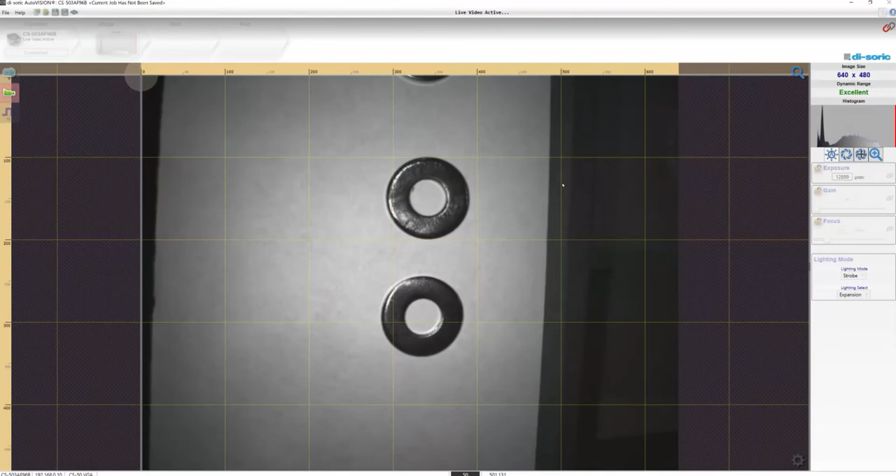But for alignment here, I'm going to turn the trigger off and I'm just going to put the camera into free run mode. I'm just going to center the objects in the middle of the field of view. Turn that off. Over here on this side, I have my auto calibration or my calibration features. The calibration or auto calibration is the one that I typically use most of the time. Again, this is an autofocus camera. So there we go. We don't have any strange glare. I'd say that image quality is pretty good.

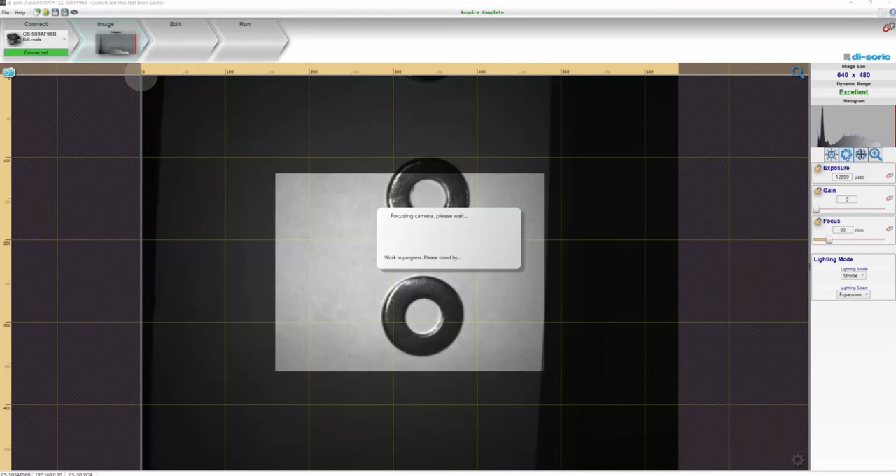You can actually also do a quick focus if you like, although I don't know why you would do that. The autofocus works very, very well. I can focus in on a specific area or detail if I like. And I can also here, with this enable zoom mode, I'm switching between the 2 focal lengths in the camera. I'm just going to do an auto calibrate. I want to take a look at both of these washers, and that's fine. So we're going to go from here.

If you want, you can play around with your exposure, your gain, and your focus. You can also change the lighting effect. So you can either turn the light on, off, you can strobe, do a power strobe, and you can use an external strobe from a flash controller.

Now the lighting select here, so you do have internal LED, those are the integrated lights, the white and red, and your expansion module. So that's the light that you order the camera with, whether it be high intensity white, high intensity red, or high intensity ultraviolet. You can also choose to buy an expansion module and even put blue in there if you like.

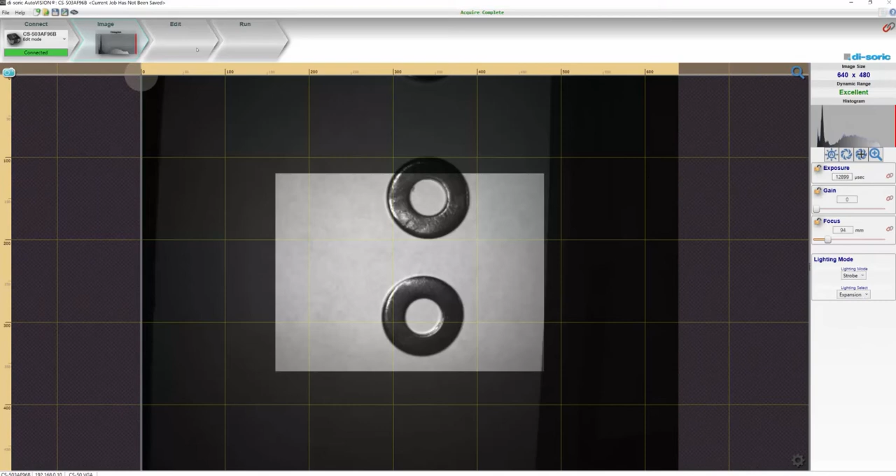Okay, so we've acquired our image. I'm going to move over to the next tab here, which is the edit section. So this is where I'm actually going to load the tools that I need to be able to do the job that I need to do. On the left-hand side here, you can see this is my tool tray, and these are my tools. So I can either drag and drop the tools in there or just simply click on them to put them in the tool tray. They will be listed in order of operation.

So on this side here, I can see my exposure and gain and focus. I'm using a sensor to trigger, so I'm going to set my trigger to sensor. It is sensor 1. The particular sensor that I am using is going to trigger on a high to low transition. I don't need to use a trigger delay, so we're good here. Okay, the first tool that I want to put in place is I want to locate the object that I'm interested in inspecting.

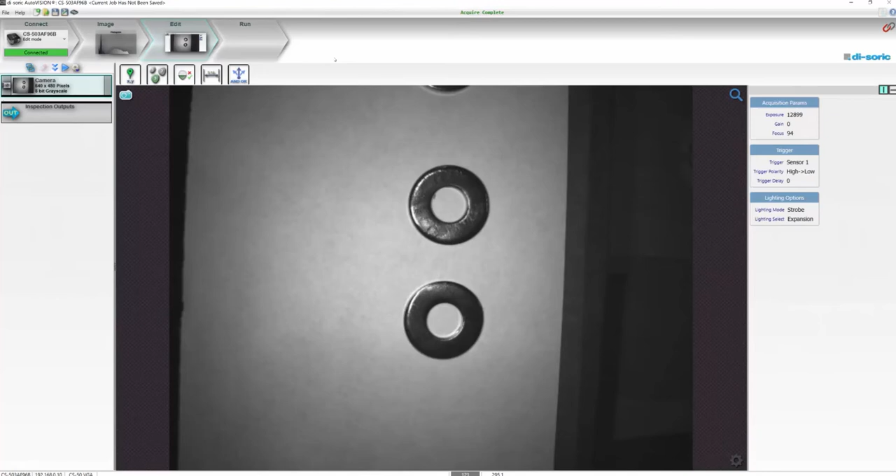Okay, so here I have my location tool. What I'm going to do is I'm going to set my region of interest. That will be the outer box here. I'm going to set it somewhat like this. So basically, anytime this object comes within this outer rectangle, it should put the tool in a positive state.

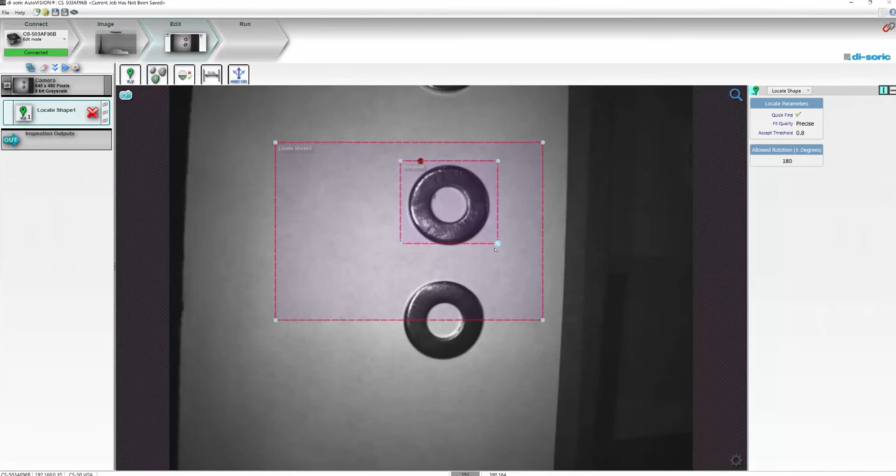Just click this little button here to train the tool. Now it's going to be looking for this object anywhere within this region of interest. I'm going to change the fit quality on this to just normal. I don't need it to be precise. All the washers are pretty much the same size, as you'll see. Okay, so I'm going to rename this. I'm going to call it locate washer 1.

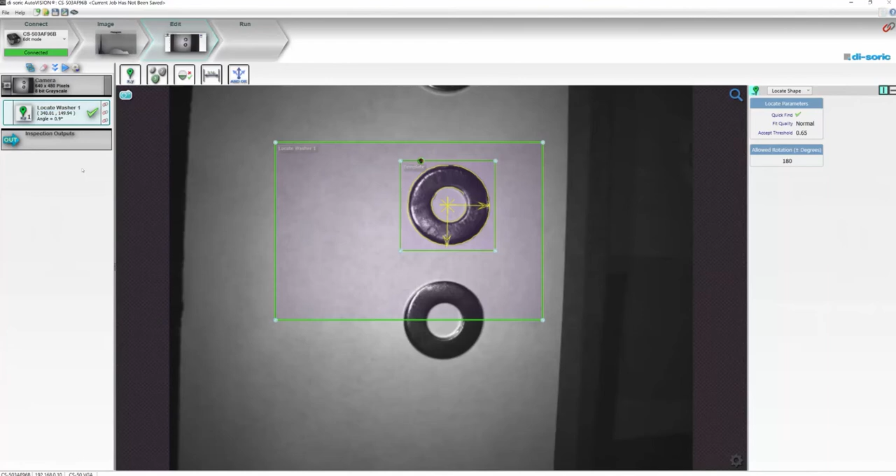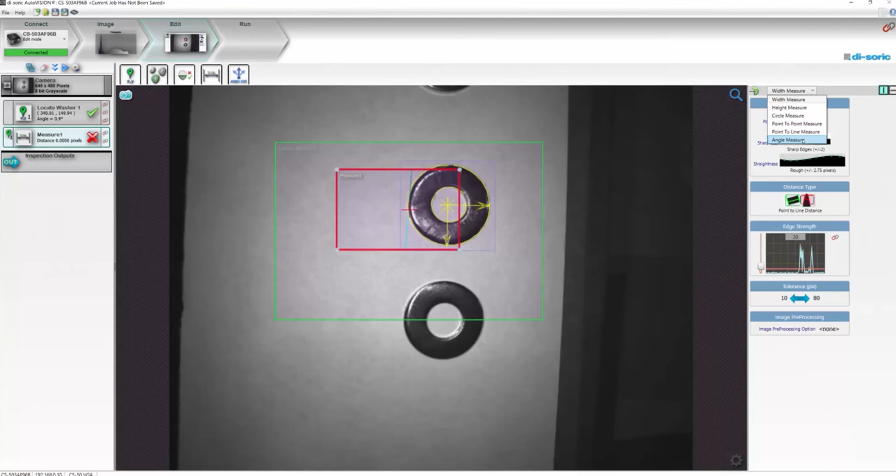Perfect. Okay, I'm going to now measure the ID, or inside diameter, of the washer. And I'm going to do that with my measurement tool. So with this tool, I can select a couple of different measuring methods. So width, height, circle, point to point, point to line, and angle measurement. In this case, I'm going to use the circle measurement.

I'm going to bring my template over top of washer 1. I'm going to bring in the inside diameter, well, the circle start, we call it. I'll bring in the circle end in this case. Now I am measuring from the inside out. The number of vectors is preset at 30. My polarity is light to dark, which is fine.

I'm going to change the edge sharpness to sharp. And you can see that kind of tightened up the points here. Okay, we'll leave that there. I'm going to rename this to circle 1 ID.

Now you can see here automatically this is the locator. So what this means is this tool, this measurement tool, is going to auto locate to this X and Y coordinate. So these two tools are now linked. I can turn that off if I like, but by default it is enabled. And I want that because this part could actually be presented anywhere within this region of interest, and having this enabled just means that this tool is going to follow this tool.

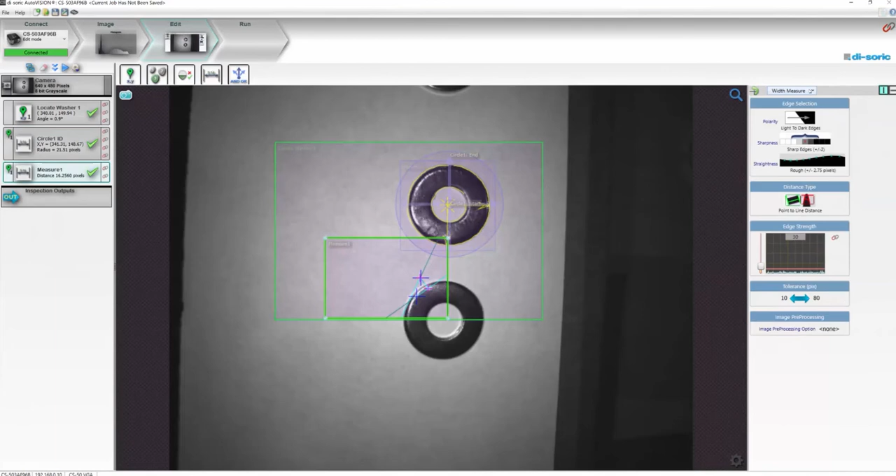So now I want to do an outside diameter measurement. So I'm going to add another measurement tool. I'm going to change it to circle measurement. I will drag the template over top of the washer. I'm going to bring this in pretty far. Maybe I'll center it a little bit more. There we go.

Set it out there. Now I want to change the scan direction. I want to go outside in. And there we go. Now I'm measuring the outside diameter. Again, I'm going to change this to sharp edges. Okay. So that looks good.

I'm going to go back to the circle 1 here first because there's something that I forgot to do. And I'm looking at my radius here, my inside diameter, and it's 21.51 pixels. I want to set my tolerance here. So I'm going to actually set this to, let's try 19 for the minimum and maybe 25 for the maximum. So now as long as this measurement falls within this tolerance, the tool's condition will be positive.

I'm going to do the same for the outside diameter here. I'm measuring 49.85. So, I'll set my lower tolerance to 47 and my upper tolerance, we'll say 52. We'll see how well that works. Okay, I'm going to change the name of this to circle 1 OD, and again I want to make sure that I link this to the locate washer tool.

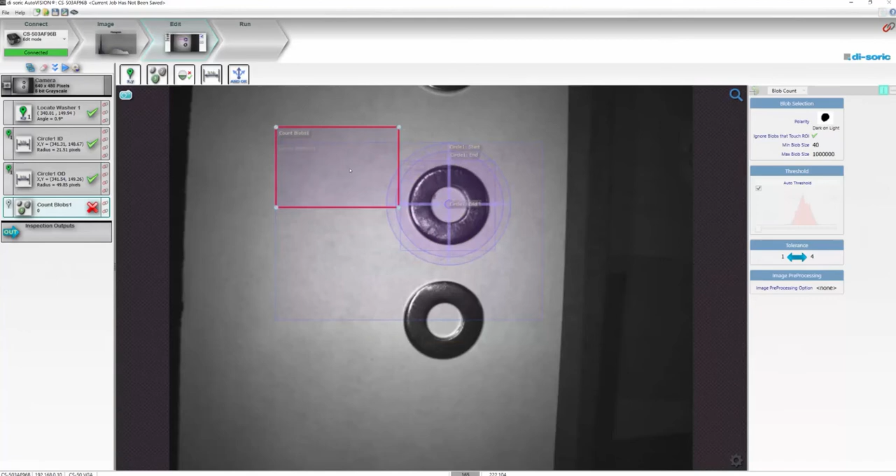Excellent. Now I actually want to count these washers as part of my process. So I'm going to put a count blob in here. I'm going to turn off the locator because I don't necessarily need to follow the washers. I just need to set a specific space here, or range for my region of interest. Now I'm going to count any washers that fall in or come into this particular region of interest.

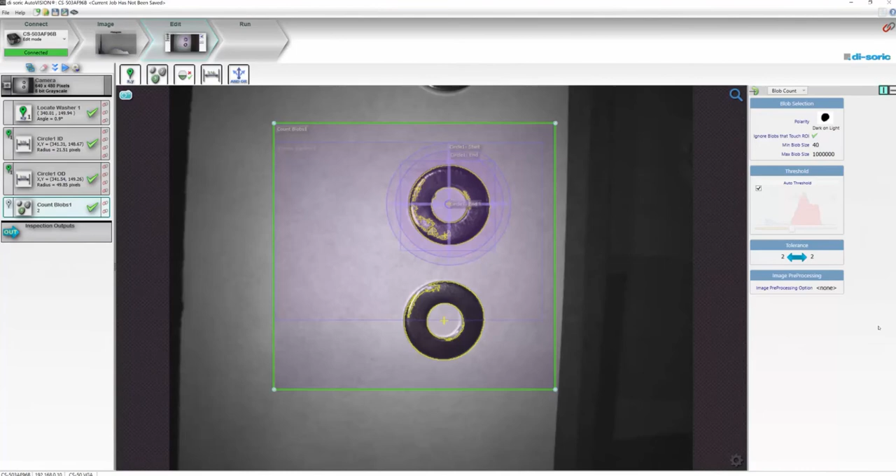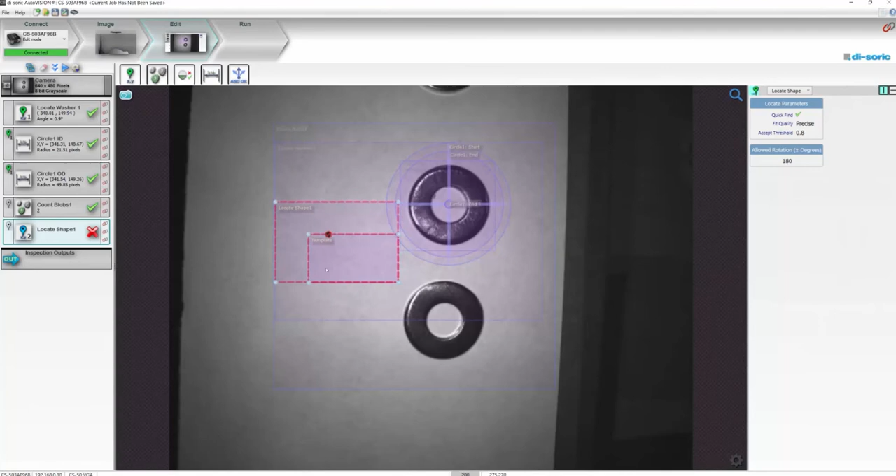Here I have my tolerance. I should always have 2 washers, so I'm going to set my min to 2 and my max to 2. Perfect. Okay, so now I want to focus on washer number 2. So the next thing that I'm going to do is I'm going to add a locate. I'm going to turn my location pin off because I don't want this tool to follow the first location tool. And I'm going to do basically the exact same thing I did for washer 1.

I'm going to train the tool. I'm going to set my fit quality to normal. Perfect. Okay, the next thing I'm going to do is I'm going to put a measurement tool in for the inside diameter of washer 2. Oh, we might as well rename this while we're here. Call it locate washer 2.

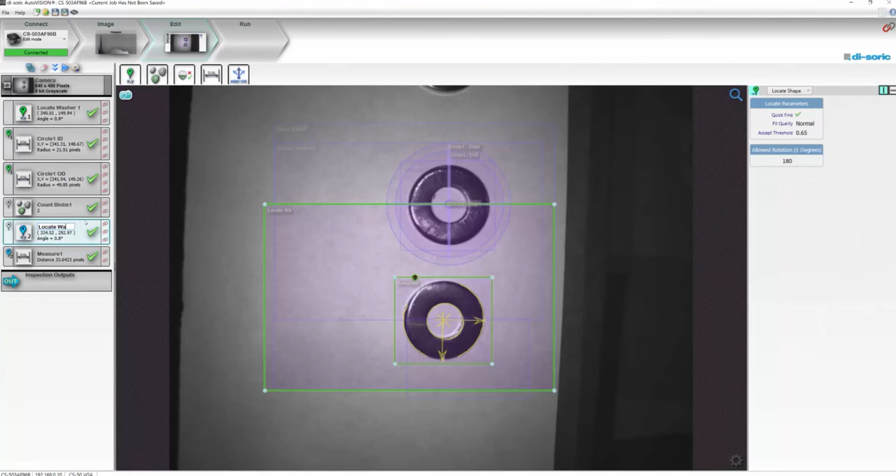While we're here, we might as well do circle 2 ID. Change this to a circle measure. Exact same process.

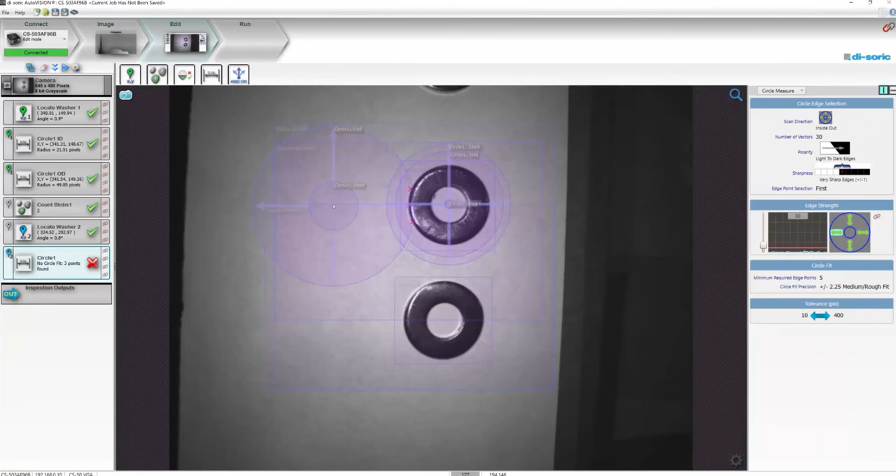Do the sharp edges. I'm going to look at my measurement. It's telling me 21.53. It really should be the same, so I'm going to set it to the same as circle 1, which is 19 and 25. Excellent. And again, this circle is going to be linked to the location of washer number 2.

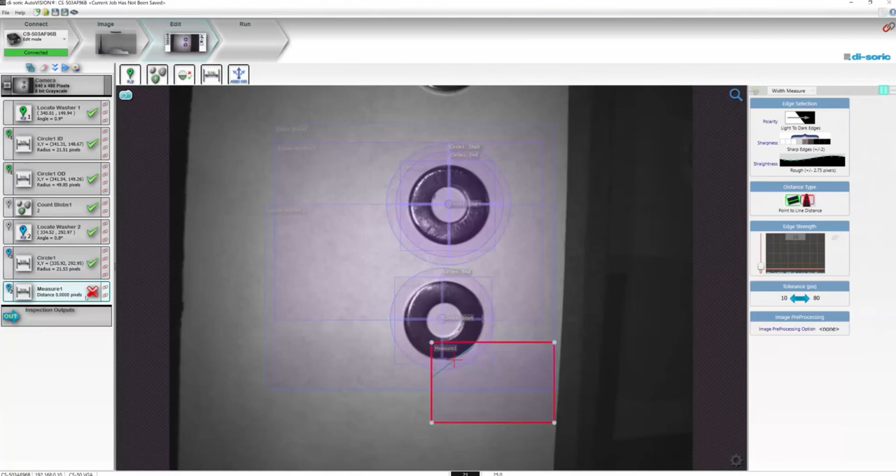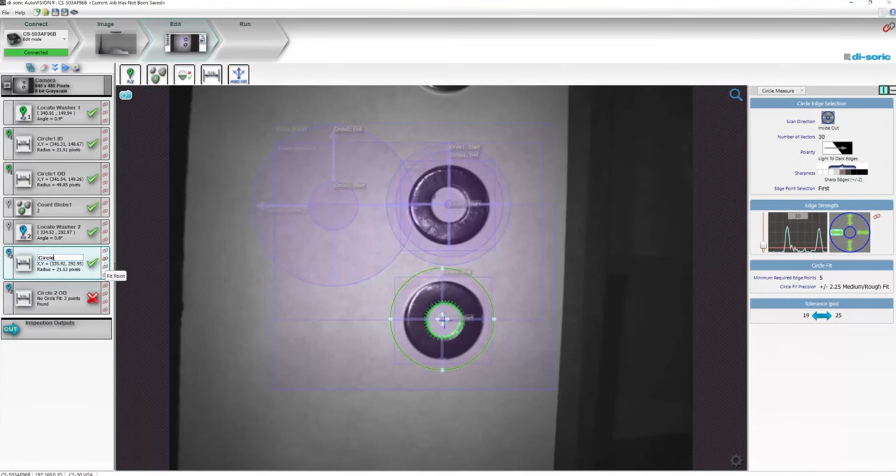We'll do the same thing again for the OD. I will rename this. This didn't take for some reason. There we go. Change this to sharp edges. We'll look at our measurement at 21.47. I need to change that to outside in. Okay, great. I should have the same measurements, 49.01, so I'm going to set it to the exact same thing of 47 and 52 for my tolerance.

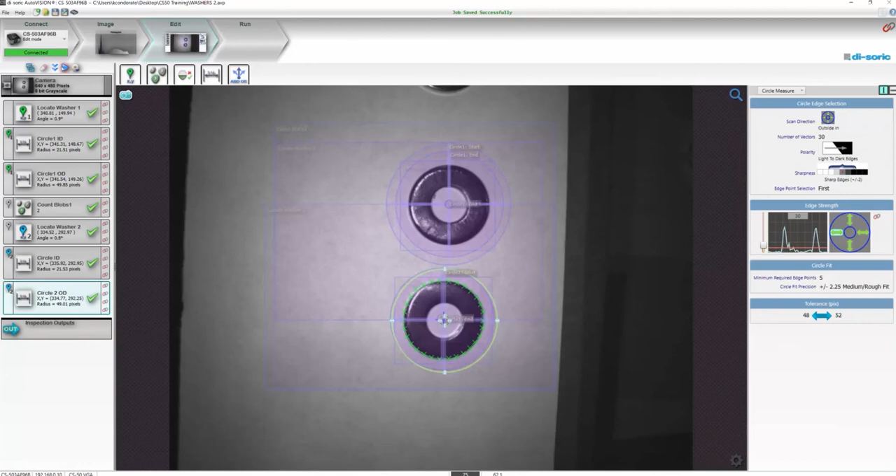I'm going to save this job to disk. I'll just call this washer 2. Great. Now what I can do here is I can run through a sample. I can either just try the job once, I can run the job in a loop, which is in a free run mode, or actually run a test. The first thing we're going to do, just to make sure everything is working fine, is I'm going to just try the job in free run or loop mode.

So that's my first trigger, and this is the master, essentially the good sample. You can see that it's passed all of the tests. So it's located washer 1, ID is within range, OD is within range. There are 2 there. Again, ID and OD for the second washer is fine too. The next sample.

Okay, so we have 3 washers in here. So it's found washers. The ID is okay. The OD is still within range. However, it is counting 3 blobs or 3 washers. So there's definitely an issue there, and the inspection has failed. Move on to the next one.

Okay, now, may be hard to see in this image here, but I do have 2 objects. The ID and OD for number 1 is fine. The OD for number 2 is fine, but the ID is incorrect, and that's because it's out of tolerance. So ID is only at 16.7, and that is correct. This is a smaller ID washer. And then the final sample.

Okay, so it's working as well. We have location of washer number 1. The ID and OD is correct. It is counting 2 washers, because that's correct. It has located the second washer. However, the ID and OD are both out of tolerance, which is correct. So our test is working fine.

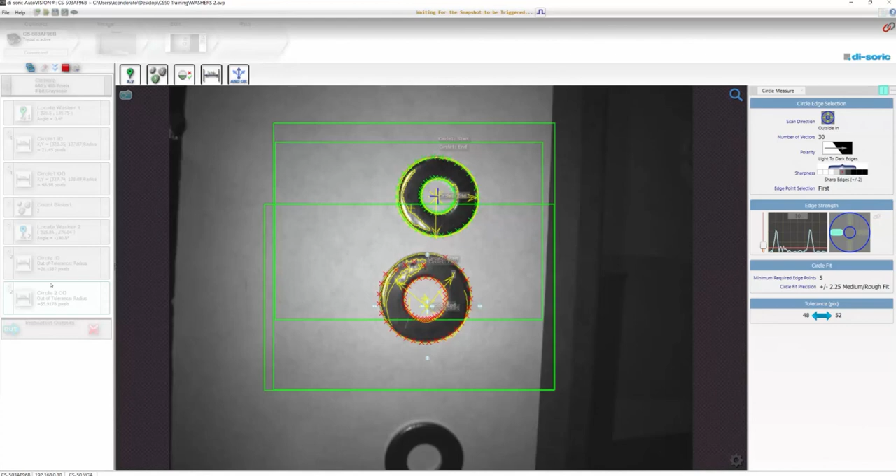Okay, so now what do I do with all of this information? Well, I can link all of these tools individually to my PLC via these little link icons. So for example, here for the locate washer, my fit quality, I can send that information to my PLC via Profinet or Ethernet IP. I'm using a float here in this case. And every one of the tools also has these links for different features, the fit point, the radius, the number of parts, so on and so forth. So I can link each individual tool to the PLC that way.

Or I can use the digital outputs. So if I click here, I can change my digital outputs or assign them to specific functions. So let's set digital output number 1. So currently it's not connected. What I can do is I can connect it to any one of these functions. So in this case, I'm going to set output number 1 to inspection passed. What that basically means is as long as all of these tools are in the positive state, this inspection pass will be a green check mark and it will output on number 1. I can set it to latch. In this case, I'm just going to pulse it.

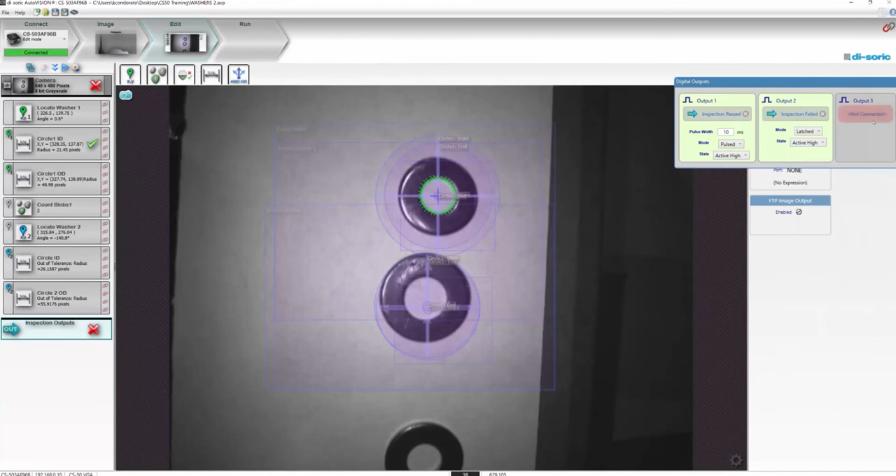Let's do number 2. So number 2, I'm going to set as an inspection fail. We'll keep that latched. And then I'm going to set my output number 3 to inspection done. So now I know, has the camera performed the inspection, and then did it pass or did it fail? The last thing we're going to do is put the camera into full run mode. You can see I have my inspection window here, my inspection status here, and the individual tool statuses here.

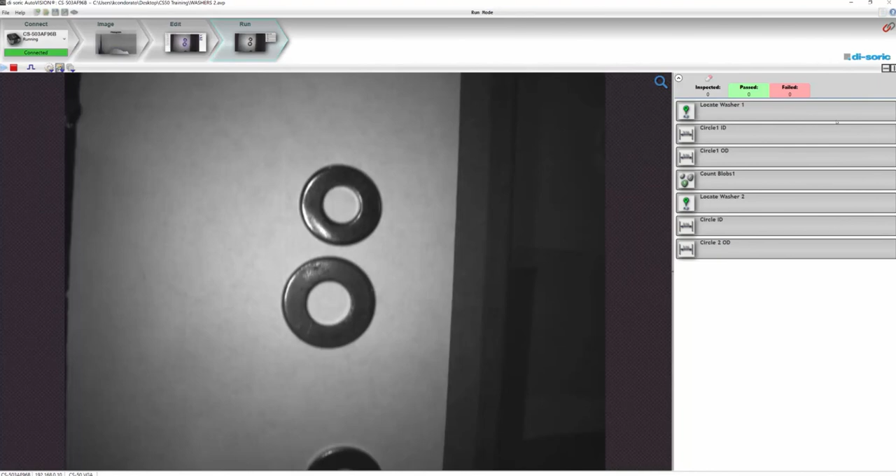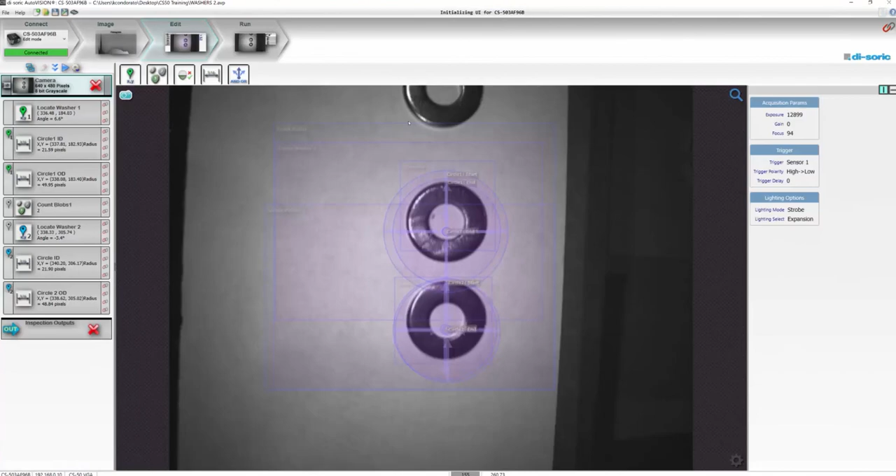Let's run one trigger through and see what happens. So this is the master sample, the only good sample of the 4. And you can see I've got 1 inspected, 1 passed, 0 failed, and these are the individual tool statuses. The next thing I'm going to do is reset the count, and I'm going to run the job through its entirety, so 4 triggers, just to see what it's going to look like. Here we go. Perfect. So here I've got 4 inspected, 1 pass, and 3 failed.